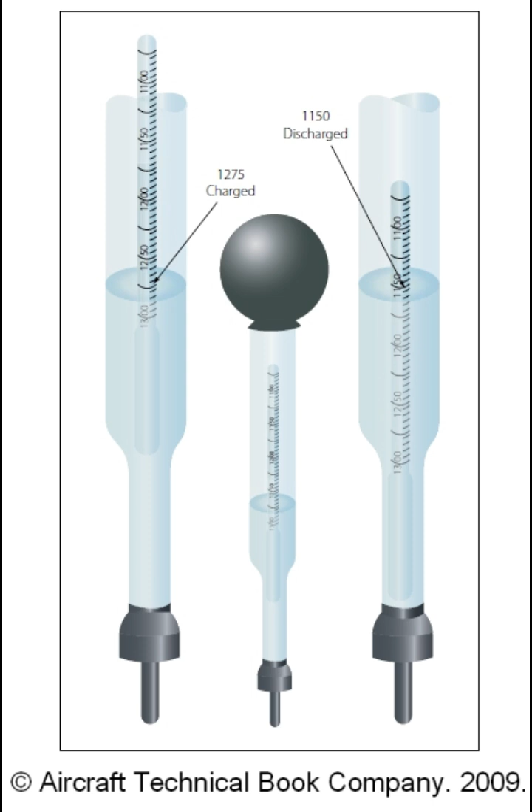This leads us to a unit called the slug, a unit of mass in the English system. An object weighing 32.2 pounds on Earth has a mass of exactly one slug. And conversely, if you know the mass, you find the weight by multiplying mass times the acceleration due to gravity, so weight equals mass times gravity. So that same one-slug object would exert less downward force on the moon because the moon's gravity is weaker.

This mass versus weight distinction also helps us understand why astronauts seem weightless up in the space station. They're just floating around, but it's not because gravity is zero up there. It's actually because the station and everything in it is constantly falling freely around the Earth, like a perpetual state of falling. Relative to their immediate surroundings inside the station, they experience that weightlessness. That's a really important distinction.

Now, another characteristic is attraction. This isn't like magnets. In physics, attraction refers to the fundamental force that exists between all particles of matter, a force that tends to pull them towards each other. Sir Isaac Newton's law of universal gravitation describes this force perfectly. It's the same force keeping us on the ground right now, and the same force that dictates how planets orbit the sun. Every single bit of matter pulls on every other bit of matter. That's pretty profound when you think about it.

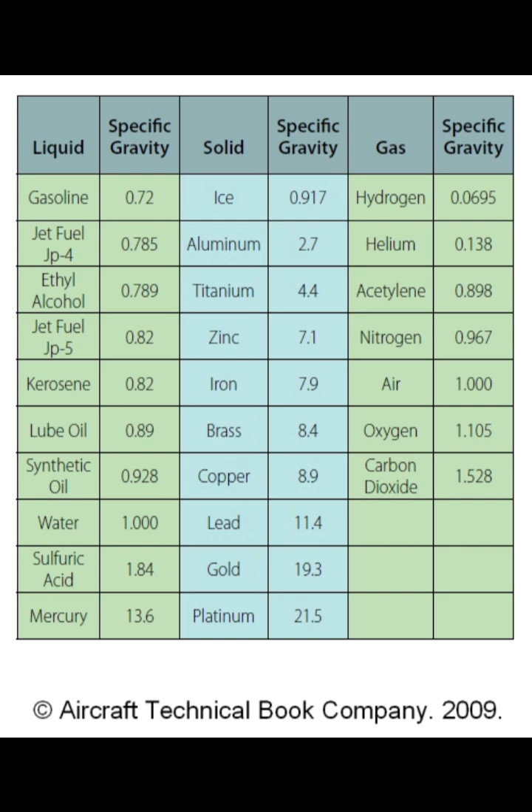And that number sounds familiar—isn't that water? It is. That's the density of pure water at 4 degrees Celsius, and it's often used as a reference point, a standard for comparing the densities of other liquids and solids. So water is the benchmark for liquids and solids.

Generally, yes. But when dealing with gases, you have to be more careful because pressure plays a big role. Ah right, gases can be squeezed. Exactly—the density of a gas is directly affected by the pressure on it, so standard conditions have been set up for reporting gas densities. Standard conditions, like what? Usually a temperature of 0 degrees Celsius and a pressure equal to 76 centimeters of mercury, the average atmospheric pressure at sea level. Got it—so density depends on weight and volume, and for gases, pressure is key.

Now, what about specific gravity? That sounds related to density. It is very related. In physics, the word specific often signals a ratio, and that's what specific gravity is—a way to compare the density of some substance to the density of a standard reference substance. Okay, a comparison—what's the standard? Well, for liquids and solids, the standard is usually water, like we just discussed. For gases, it's typically air, although sometimes hydrogen is used instead.

So it's like a relative density score. How do you calculate it? There are a couple of ways. For liquids and solids, you can take the weight of a certain volume of the substance and divide it by the weight of the exact same volume of water. Or you can just divide the density of the substance by the density of water. Same idea for gases, just using air or hydrogen as the denominator.

And what units does specific gravity have? Ah, that's a key point—specific gravity is actually a dimensionless ratio. It has no units. It's just a number.

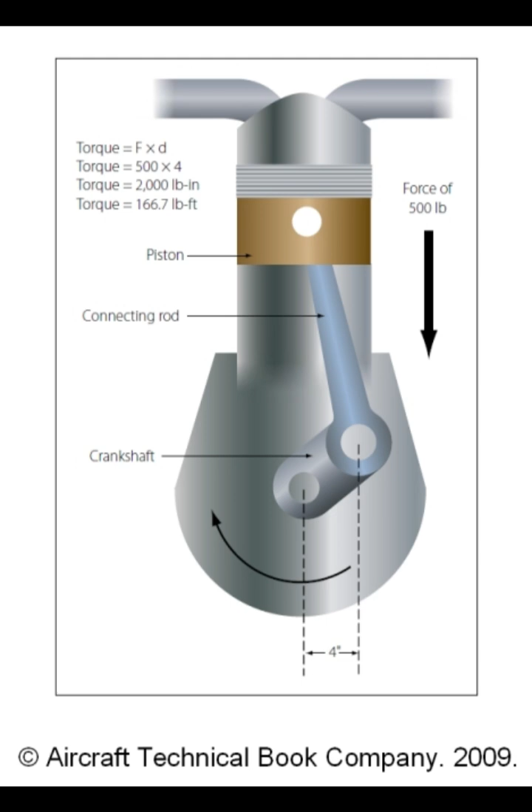And units - pounds? Yep, the standard unit in the English system is the pound. In metric, it's the Newton, N. 1 pound is about 4.448 newtons. And when we talk about engine thrust, we're talking about force. We use that famous formula, force equals mass times acceleration, F equals ma. The result is expressed in pounds of thrust, like for a big jet engine. Exactly, that huge GE 90-115B turbofan can produce something like 115,000 pounds of thrust. That's pure force pushing the plane forward - an incredible amount of push.

So how does force relate to the idea of work? Well, in physics, work is done specifically when a force acts on an object and makes it move some distance. So you need both force and movement - yes, absolutely, both are required. And the movement has to be in the direction of the force. The formula is simple: work equals force times distance. W equals FD. And the units are foot-pounds.

So if I push as hard as I can against a parked 747 and it doesn't move an inch - you might feel tired, but technically in physics terms, you haven't done any work. No displacement, no work. But if a jack lifts, say, an Airbus A320 that weighs 150,000 pounds, and lifts it 4 feet, now you've done work. The work done is 150,000 pounds times 4 feet, which equals 600,000 foot-pounds.

Or another example - a tow tractor pulling a Boeing 737-800, maybe 130,000 pounds, into a hangar. If the tractor exerts a steady force of 5,000 pounds over a distance of 80 feet, the work done is 5,000 pounds times 80 feet, or 400,000 foot-pounds. Notice something interesting there - the force is much less than the plane's weight. Exactly, because the movement is horizontal, the tractor isn't lifting the plane's full weight.

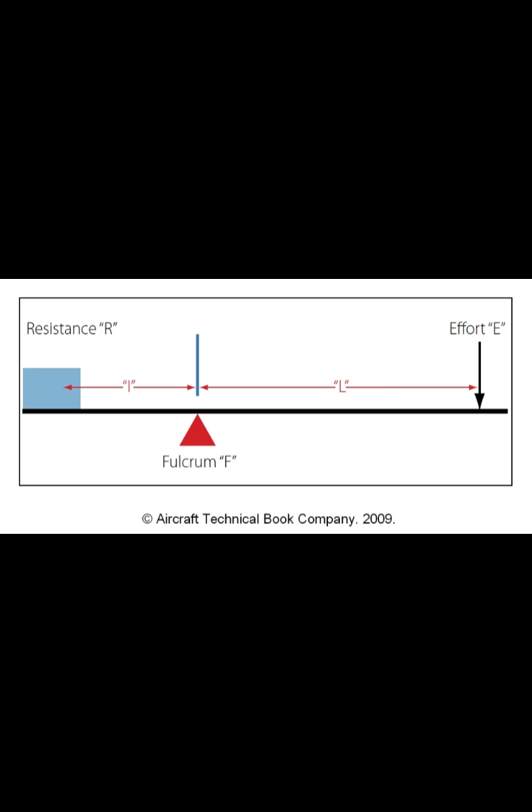Okay, let's use an example. That GE90 engine we mentioned weighs about 19,000 pounds. If we lift it 4 feet, maybe it takes 2 minutes. How much power is that? All right, first, the work done: 19,000 pounds times 4 feet is 76,000 foot-pounds.

Now, power is work over time. The time is 2 minutes, so power is 76,000 foot-pounds divided by 2 minutes, just 38,000 foot-pounds per minute. Exactly. Now, to convert that to horsepower, we divide by the conversion factor, 33,000 foot-pounds per minute per horsepower. So 38,000 divided by 33,000 comes out to about 1.15 horsepower. So even lifting that heavy engine fairly slowly takes over 1 horsepower. Yep, shows you why we use machinery for things like that.

Definitely. Okay, last one in this group: torque.

It sounds like work you mentioned, but it's different. That's right, they can seem similar but they're conceptually different. Work is force acting through a distance, causing linear displacement. Torque is a force acting at a distance from a pivot or axis, creating a rotational or twisting effect.

Twisting force, like using a wrench. Perfect example. You apply force to the wrench handle, which is some distance from the bolt. That force at that distance creates torque, which turns the bolt.

And the units look similar, inch-pounds or foot-pounds. Yeah, they often look the same, pound-feet or foot-pounds, pound-inches or inch-pounds. But the meaning is different. Work is force times linear distance. Torque is force times lever arm distance.

Okay, and this is critical for engines. Absolutely essential for understanding how both piston engines and turbine engines create rotation. How does it work in each type?

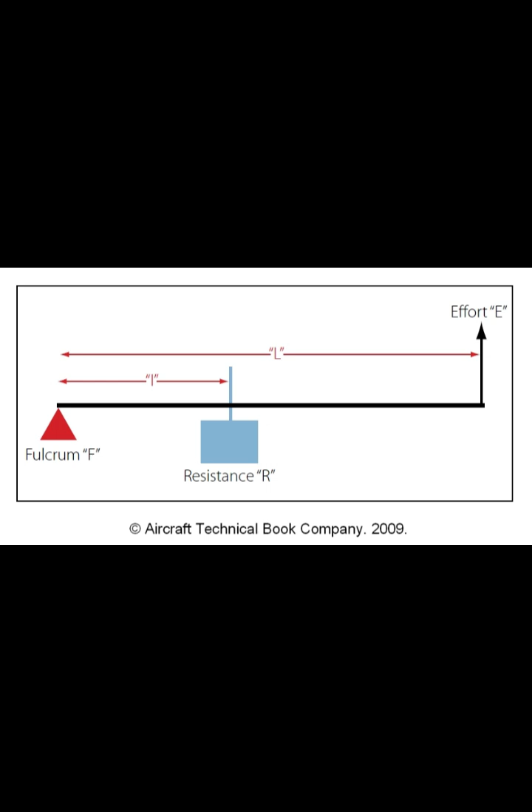How do they do that? Generally, simple machines work in one of three ways. They can multiply the force you put in, they can increase the speed or distance that the force acts over, or they can simply change the direction of the force you apply.

Okay, and we talk about mechanical advantage. Right, mechanical advantage tells you how much the machine multiplies your input force or distance. It's the ratio of the output force to the input force, or alternatively, the ratio of the output distance moved to the input distance moved. But here's a key thing: machines can't create energy. They can't give you more work output than the work you put in. There's always a trade-off, no free lunch basically.

Okay, let's start with levers. I remember there are different classes of levers based on the pivot point. Exactly, there are three classes, and it all depends on where the fulcrum, that's the pivot point, the effort, where you apply force, and the resistance, the load you're moving, are relative to each other. Okay, let's break them down.

Class 1, first class lever. The fulcrum is between the effort and the resistance. Think of a seesaw or maybe using a crowbar. Right, fulcrum in the middle. And depending on where that fulcrum is placed, a first-class lever can give you either a force advantage, less effort to move the load, or a distance-speed advantage. The load moves further faster than the effort point, or it might just change the direction of the force.

Okay, second class lever. The fulcrum is at one end, the effort is applied at the other end, and the resistance is somewhere in between. Fulcrum at one end, effort at the other, load in the middle. Like a wheelbarrow. Perfect example, a wheelbarrow is a classic second class lever. And this type always gives you a force advantage, always multiplies your force.

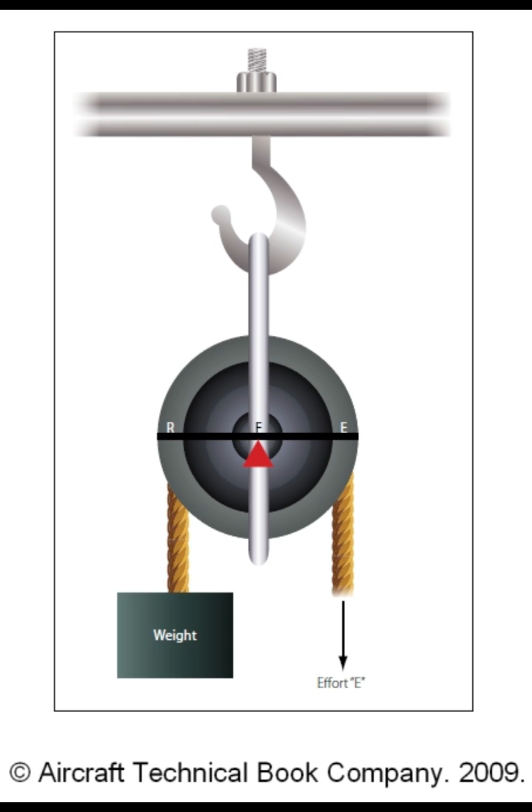Okay, moving from levers to pulleys. A pulley is basically a wheel on an axle designed to support movement of a rope or cable along its circumference. It usually has a groove. The pulley itself is often held in a frame called a block. When you have a system with multiple pulleys and ropes, that's called a block and tackle. What about just a single pulley?

Well, a single fixed pulley, one that's attached to a support and doesn't move up or down, acts just like a first-class lever with equal arms. So mechanical advantage of one. Exactly, it doesn't multiply your force. It just changes the direction you pull in, which can be really convenient.

Makes sense. What if the pulley itself moves with the load? Ah, that's a single movable pulley. That one acts like a second-class lever. It gives you a mechanical advantage of 2, so it halves the effort needed. Yes, but there's a trade-off: you have to pull twice the length of rope for the load to move up a certain distance. Force is halved, distance pulled is doubled. Okay, fixed pulley changes direction, movable pulley multiplies force.

Now, gears. Gears are essentially toothed wheels that mesh together to transmit motion and force, usually changing speed or torque, or sometimes direction. Different types of gears: spur gears have straight teeth parallel to the axis and connect parallel shafts. Bevel gears have angled teeth and connect shafts that are at an angle, allowing you to change the plane of rotation, like from horizontal to vertical.

Worm gears involve a screw-like worm meshing with a worm wheel and give you very large gear reductions. Large reduction, meaning speed decreases a lot. Yes, speed decreases significantly, but torque increases proportionally.

Then there are planetary gears. Planetary, like planets orbiting a sun? Sort of—you have a central sun gear, several planet gears orbiting it, and an outer ring gear. They're compact and offer specific, often quite large, gear reduction ratios based on the number of teeth on each gear. And the gear ratio always affects speed and torque. Always—if you gear it to increase speed, torque goes down. If you gear it to increase torque, speed goes down. That's the trade-off, assuming no energy loss to friction.

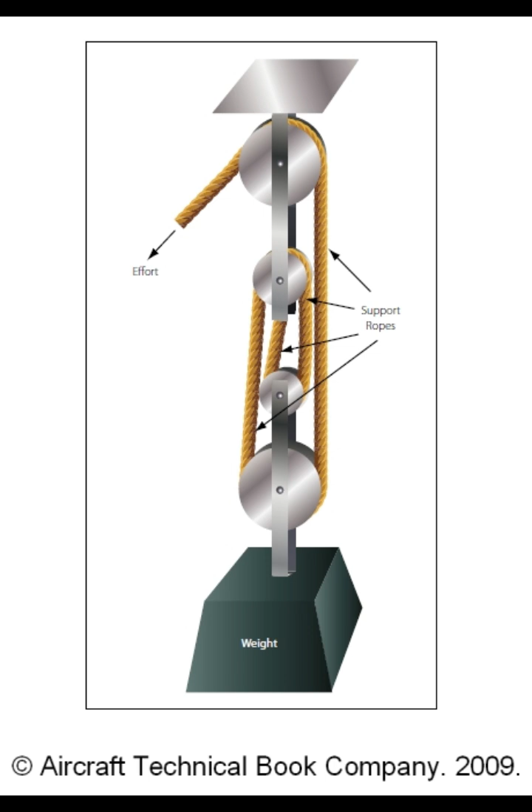The same basic lever equation can actually be applied: effort times the length of the ramp, the effort arm, equals the resistance, the object's weight, times the vertical height of the ramp, the resistance arm. So if you push a 1,600-pound airplane up a ramp that's 24 feet long and rises 6 feet vertically.

The effort needed, ignoring friction, would be 1,600 pounds times 6 feet divided by 24 feet, which is 400 pounds—much less than lifting 1,600 pounds straight up. Right, and things like screws, bolts, and wedges are all applications of the inclined plane principle too. A small rotational force over many turns becomes a large linear force. Clever. Okay, that covers simple machines.

Now let's think about what happens inside materials when forces are applied: stress and strain. Stress is the internal resistance within a material to an external force that's trying to deform it. It's like the internal forces the molecules exert on each other. Internal resistance, and it comes in different forms.

There are 5 main forms, generally. Tension is a pulling force, trying to stretch something apart, like ropes in a block and tackle. Compression is a pushing or crushing force, like the force on landing gear when the plane touches down. Torsion is stress from twisting, like the torque on an engine drive shaft. Bending is actually a combination—one side of the object is in tension, the other side is in compression. Like an airplane wing bending upwards in flight: the top surface is stretched, tension, the bottom is squeezed, compression. Tension and compression together.

And the last one, shear. That's a force trying to make layers of the material slide past each other, like scissors cutting paper, or the force on a bolt connecting two overlapping plates. Okay, tension, compression, torsion, bending, shear—those are the types of stress.

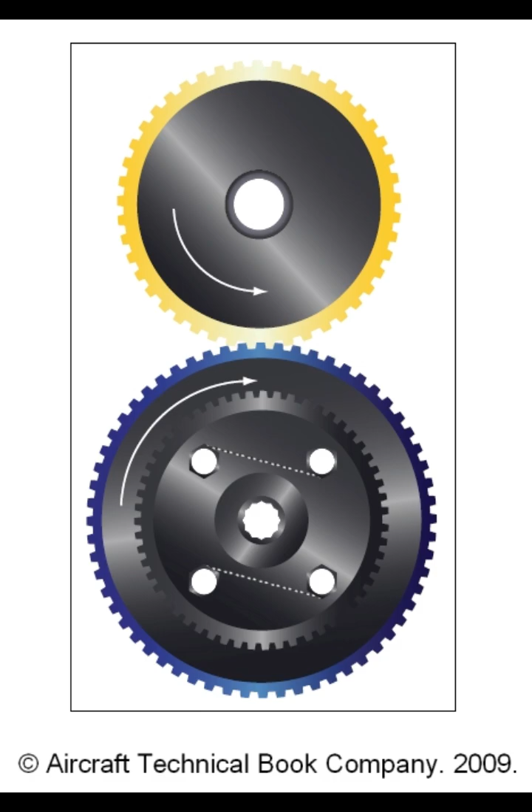So if velocity is changing, that leads to acceleration. Acceleration is the rate of change of velocity, not just speed, but velocity—so speeding up, slowing down, or changing direction all count as acceleration. The formula for average acceleration is the change in velocity, final velocity minus initial velocity, divided by the time it took for that change.

Example: say an F-15 fighter jet goes from 400 miles per hour to 1,200 miles per hour in 20 seconds. The change in velocity is 1,200 minus 400, equals 800 miles per hour. The time is 20 seconds, so the acceleration is 800 miles per hour divided by 20 seconds, which is 40 miles per hour per second—40 miles per hour faster every second. And we can convert that to feet per second squared, which is a more standard unit. It works out to about 58.7 feet per second squared.

And we can relate that to g-force. 1g is the acceleration due to gravity, about 32.2 feet per second squared. So 58.7 divided by 32.2 is roughly 1.82 Gs—that's the force the pilot feels pushing them back in their seat. Feeling heavier during acceleration.

These ideas—force, mass, acceleration—bring us straight to Newton's laws of motion. Absolutely fundamental for aviation, right? Couldn't fly without them; they are the bedrock of classical mechanics. Let's start with Newton's first law.

The law of inertia. It basically says an object at rest stays at rest, and an object in motion stays in motion with constant velocity, same speed, same direction, unless acted upon by an external force. Things keep doing what they're doing unless something interferes. Exactly, that's inertia, the resistance to change in motion.

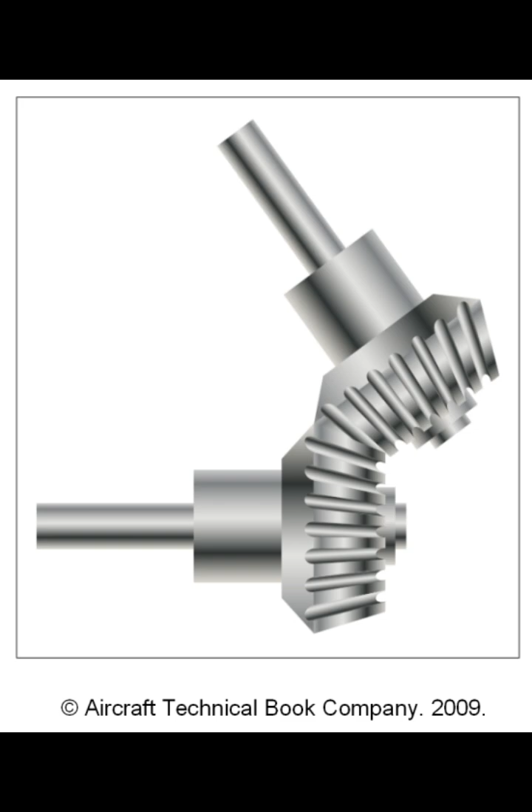And the third law, the famous one: action-reaction. For every action, there's an equal and opposite reaction. Forces always come in pairs. When you push on a wall, that's the action; the wall pushes back on you with the same force, that's the reaction.

In aviation, when a propeller pushes air backward, that's the action, and the air pushes the propeller and thus the plane forward, that's the reaction. That's thrust. Same for a jet engine: the engine throws hot gas backward at high speed, action, and the reaction force pushes the engine and the plane forward. Lift is also related.

The wing pushes air down, action. The air pushes the wing up, reaction. Action-reaction pairs everywhere. Okay, Newton's laws are key.

Now, what about motion that isn't in a straight line? Like turning, circular motion. Circular motion is motion along a curved path with a constant radius. Think of swinging a weight on a string around your head.

Even if the speed is constant, the velocity is always changing because the direction is always changing. Right, velocity includes direction. And since velocity is changing, there must be acceleration. And if there's acceleration, Newton's second law, F=MA, tells us there must be a force causing it.

A force required just to keep it moving in a circle. Yes, this force is always directed towards the center of the circle. It's called centripetal force, center-seeking force. Without it, the object would just fly off in a straight line, tangent to the circle. Centripetal force pulls it inward, keeping it on the curved path.

Is there a formula? Yep, centripetal force, Fc, equals mass times velocity squared divided by the radius of the circle, Fc = mv squared over r. Again, mass, not weight. Use mass, weight divided by 32.2. Velocity should be in feet per second and radius in feet.

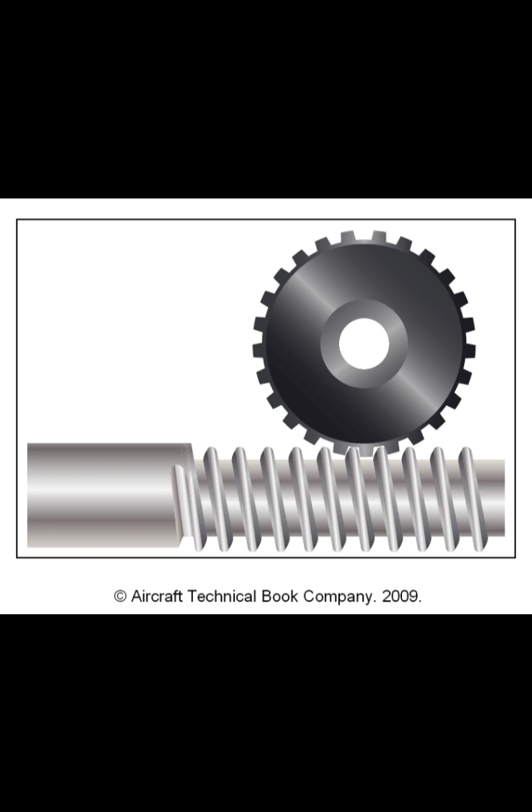Wow, that really highlights the forces on rotating parts in engines, like turbine blades spinning super fast. Exactly, the stresses involved are immense.

Incredible. Okay, let's switch gears again, moving from motion to another fundamental form of energy: heat. Heat is a form of energy, often defined as energy transferred between systems because of a temperature difference. It's also closely related to the internal energy of a system, specifically the kinetic energy of all the randomly moving molecules within it. More heat generally means more molecular motion.

So higher temperature means molecules are bouncing around faster. That's the basic idea, yes.

And heat can be generated by converting other forms of energy. Mechanical energy from friction becomes heat. Electrical energy in a heating element. Chemical energy in burning fuel. Radiant energy from the sun. Nuclear energy. They can all be converted to heat.

So compressing a gas makes it hotter. Yes, because the mechanical work done to compress it increases the kinetic energy of the gas molecules. Conversely, letting a gas expand rapidly makes it cool down.

And friction definitely generates heat. Absolutely, rub your hands together. That's mechanical energy turning into heat via friction. The core theory views heat as the total kinetic energy of those moving particles.

Okay, how do we measure heat energy? What are the units? Two common units are the calorie, with a small c, and the British thermal unit, or BTU. 1 calorie is the heat needed to raise the temperature of 1 gram of water by 1 degree Celsius. 1 BTU is the heat needed to raise 1 pound of water by 1 degree Fahrenheit. Grams in Celsius for calorie, pounds in Fahrenheit for BTU.

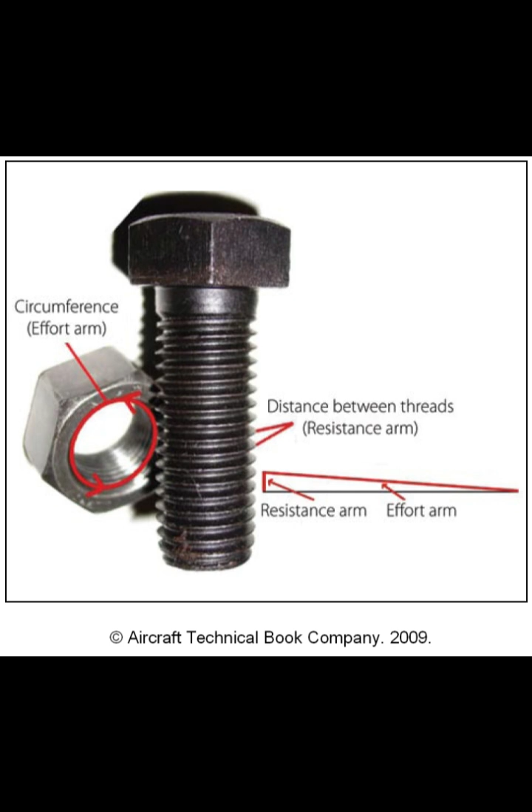Wow. Yeah. So think about aviation gasoline. 1 pound of it has about 18,900 BTUs of chemical energy locked inside. If you could convert all that energy perfectly into work, it would be 18,900 BTU times 778 foot-pounds per BTU, which is over 14.7 million foot-pounds of potential work per pound of fuel.

Incredible potential. But engines aren't perfect, right? Thermal efficiency. Exactly. Real engines lose a lot of that potential energy as waste heat through the exhaust, the cooling system, and friction. Thermal efficiency is the ratio of the useful work or power the engine actually produces compared to the potential power available in the fuel it consumes.

How efficient are typical aircraft engines? Well, a typical aircraft piston engine might only have a thermal efficiency of around 25% to 30%. So 75% of the fuel's energy is just lost. Mostly lost as heat, yes. Improving thermal efficiency is a huge goal in engine design.

I can see why. Okay, so a lot of energy is wasted as heat. How does heat actually get from one place to another? What are the transfer mechanisms? There are 3 main ways heat moves: conduction, convection, and radiation. Okay, conduction first.

Conduction is heat transfer through direct physical contact. Hotter, faster-moving molecules bump into slower, cooler ones and transfer kinetic energy. Like heat traveling up a metal spoon left in hot soup. Perfect example. Metals are generally very good conductors of heat. Materials like wood, plastic, or air are poor conductors. We call them insulators. Okay, direct contact transfer, what's convection?

Convection is heat transfer by the movement of fluids. That means liquids or gases. Movement of the fluid itself. Yes. When you heat a fluid, it usually becomes less dense and rises. That rising fluid carries thermal energy with it. Think of hot air rising from a radiator, or water boiling in a pot. The hot water rises, cooler water sinks, creating a convection current.

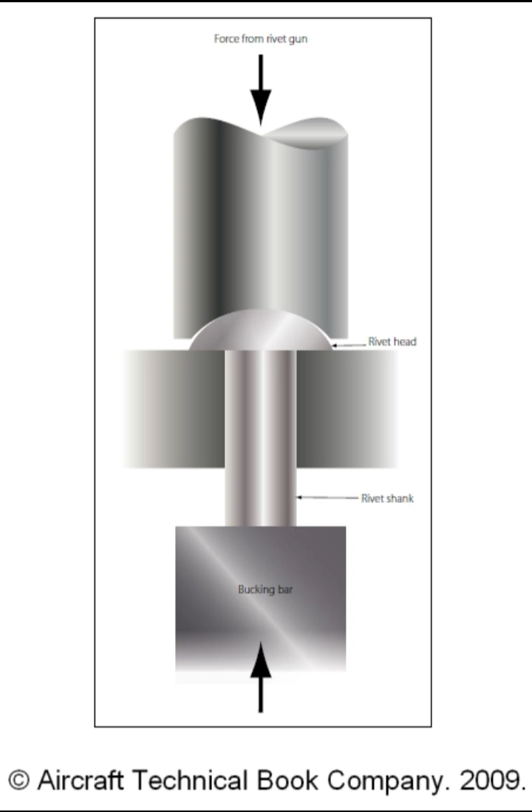Now, specific heat, what does that term mean? Specific heat capacity, or just specific heat, tells you how much heat energy is needed to raise the temperature of a certain amount of a substance by 1 degree. How much heat for a 1 degree change? Right, usually per unit mass, like per gram or per pound. It's an intrinsic property of the material itself. Some materials heat up easily with little energy, others require a lot more heat for the same temperature change.

And water is special here. Water has a remarkably high specific heat capacity compared to most common substances, meaning it takes a lot of energy to heat water up. Yes, and it also means it releases a lot of heat when it cools down. This is why large bodies of water, like oceans, have such a moderating effect on the climate of nearby land areas. They resist large temperature swings, acting like a big thermal buffer.

Okay, let's talk about temperature itself. We measure how hot or cold something is, but there are different scales. The three main scales you'll encounter are Celsius (degrees C), Fahrenheit (degrees F), and Kelvin (K). Celsius is based on water freezing at 0 degrees C and boiling at 100 degrees C at standard pressure. Fahrenheit sets those points at 32 degrees F and 212 degrees F.

Okay, different reference points. What about Kelvin? Kelvin is an absolute temperature scale. 0.0 K is absolute zero, the theoretical point where all molecular motion stops. It's impossible to actually reach, but it's the fundamental zero for thermodynamics. Water freezes at about 273.15 K and boils at 373.15 K.

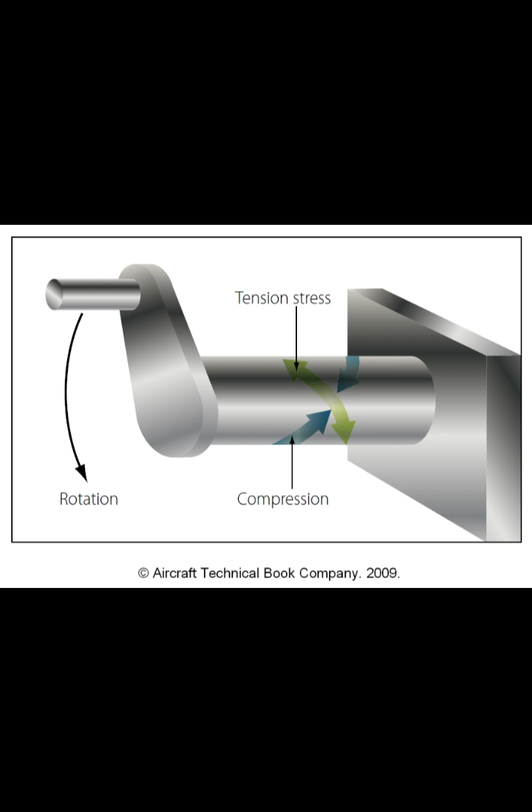Okay, focusing on solids, like in aircraft structures, how do we quantify that expansion? We use something called the coefficient of linear expansion. It's the property of the material that tells you how much its length changes for every degree change in temperature, per unit of its original length - a coefficient for each material. The formula for the change in length involves alpha, the coefficient, L, the original length, and the change in temperature.

So length times coefficient times temperature change. Exactly. For example, a steel rod might expand a tiny fraction of an inch for every foot of its length for each degree Fahrenheit rise. Doesn't sound like much. It doesn't, but if you have a long structure, like an aircraft wing, spanning many feet, and it experiences a large temperature swing from ground to high altitude, that total expansion can be significant. And if that expansion is blocked or constrained, it can generate enormous internal forces and stresses. Aircraft design has to account for this thermal expansion and contraction very carefully, using expansion joints or materials with compatible expansion rates to avoid damage.

Critical design consideration, then. Okay, let's move on to pressure. Pressure is defined as force acting perpendicularly on a surface, divided by the area over which that force is distributed.

Pressure is force per unit area, force divided by area. Common units include pounds per square inch, PSI. In meteorology and sometimes aviation, you also see inches of mercury (Hg), millimeters of mercury, or millibars.

Inches of mercury? How does that measure pressure? That comes from the mercury barometer, an inverted tube of mercury sitting in a dish of mercury. The atmosphere pushes down on the mercury in the dish, and that pressure supports a column of mercury inside the tube. The height of that column, measured in inches or millimeters, indicates atmospheric pressure. Ah, so the weight of the air balances the weight of the mercury column. Precisely. Standard atmospheric pressure at sea level is defined as 14.7 psi, equivalent to supporting a column 29.92 inches high. So 14.7 psi equals 29.92 inches Hg.

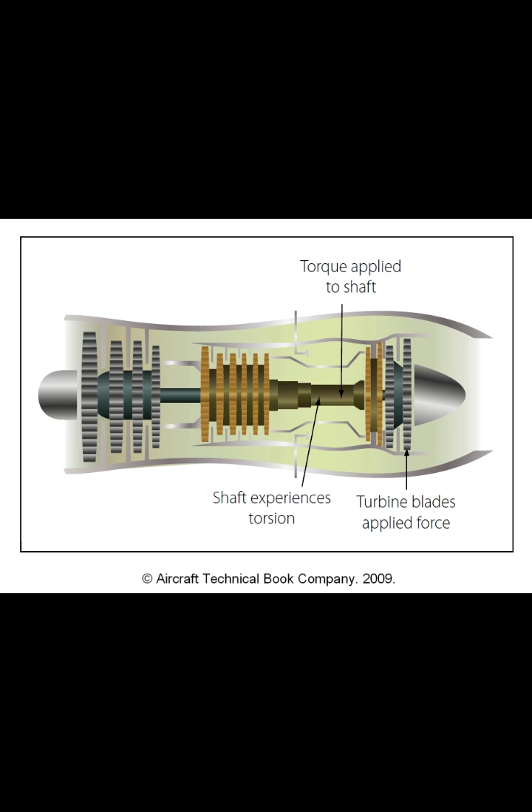That's why tire pressure increases on a hot day, the air molecules inside speed up.

Makes sense. And Dalton's law? Something about mixtures. Dalton's law of partial pressures says that if you have a mixture of gases that don't chemically react with each other, the total pressure of the mixture is simply the sum of the pressures that each gas would exert if it were alone in the same container. So each gas contributes its own partial pressure to the total. Exactly. It's related to the proportion of each gas in the mixture, important for understanding air, which is a mixture.

Okay, pressure is force over area, caused by molecular collisions in gases. Now let's get into fluid mechanics, crucial for aviation. Absolutely. Fluid mechanics studies how fluids, which includes both liquids and gases, anything that can flow, behave, both when they're still, fluid statics, and when they're moving, fluid dynamics.

Liquids and gases, what's the key difference? A major difference, especially in aviation contexts, is compressibility. Liquids are generally considered incompressible, their volume doesn't change much with pressure. Gases, however, are highly compressible.

And fluid mechanics explains things like lift. Lift, hydraulics, airflow through engines, many core aviation principles rely heavily on fluid mechanics.

Let's start with buoyancy, that upward push fluids give. Right, buoyancy is the upward force exerted by a fluid on any object immersed in it. It opposes the object's weight, making it seem lighter. And if the buoyant force is big enough, the object floats. Exactly, an object floats if the buoyant force equals or exceeds its weight. Archimedes' principle is the key here.

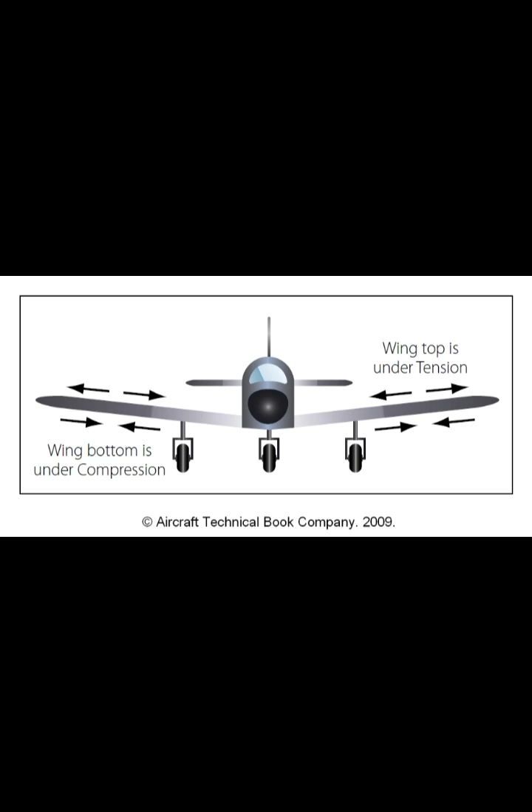Yes. And interestingly, the pressure at the bottom of a container just depends on the height of the liquid column and its density, not the shape of the container itself. Shape doesn't matter, only height. For static pressure at the bottom, yes.

We also distinguish between static pressure, due to height or depth, and dynamic or ram pressure, which is pressure associated with the fluid's motion, its kinetic energy. Static versus dynamic pressure, okay. The total pressure in a moving fluid is the sum of the static and dynamic pressures. We measure this total pressure in places like jet engine inlets.

Got it. Now, Pascal's law. Something about pressure acting equally in hydraulics. Exactly. Pascal's law has two key parts. First, pressure at any point in a confined static fluid acts equally in all directions. Second, if you apply an additional pressure to a confined, incompressible fluid, that pressure increase is transmitted undiminished throughout the entire fluid. Transmitted everywhere equally.

How does that help with hydraulics? It's the foundation. Because pressure equals force over area, if you apply a small force to a small piston, small area, you create a certain pressure in the hydraulic fluid. That pressure is transmitted everywhere. If that same pressure then acts on a much larger piston, large area elsewhere in the system, the output force on that large piston will be much larger than the input force.

Ah, you multiply the force. Yes. Apply 5 pounds to a 0.5 square inch piston, you get 10 psi pressure. If that 10 psi acts on a 5 square inch piston, the output force is 10 psi times 5 square inches, equals 50 pounds. You turn 5 pounds into 50 pounds. That's the magic of hydraulics.

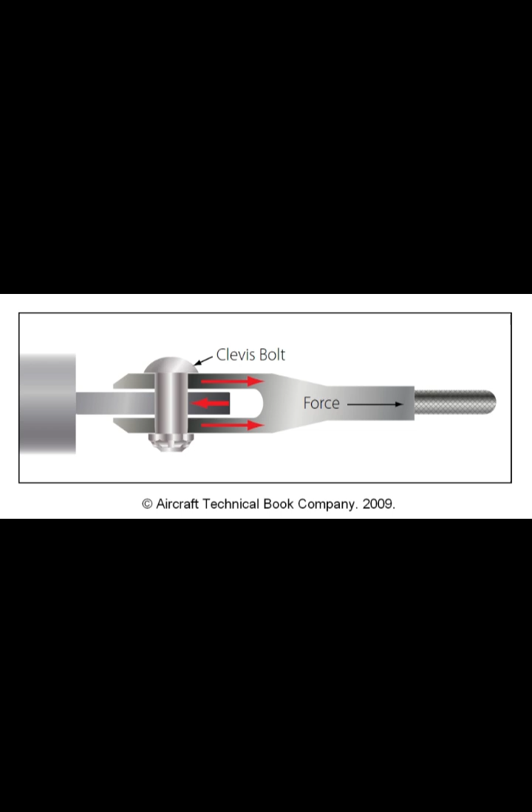How does this create lift on a wing? An airplane wing's airfoil shape is designed, crucially, so that the air flowing over the curved top surface travels a longer distance than the air flowing under the relatively flatter bottom surface in the same amount of time. So the air on top has to go faster.

Exactly. And according to Bernoulli, that faster-moving air on top exerts lower static pressure than the slower-moving air underneath the wing. Lower pressure on top, higher pressure on the bottom. Creates a net upward force. That pressure difference, acting over the whole area of the wing, is lift. Amazing. Just the shape of the wing makes the air speed up on top, pressure drops, and it gets sucked upwards. That's a good way to visualize it.

It's also used in carburetors. The Venturi effect creates low pressure to suck fuel into the airflow. It's fundamental to subsonic flight. Bernoulli: faster flow, lower pressure.

Got it. Okay, let's switch to sound now. What is sound physically? Sound is basically a disturbance, a vibration, that travels through matter, a medium, like air, water, or solids, as a wave. A wave traveling through a medium.

What's needed for sound? Usually 3 things: a source to create the vibration, like vocal cords or a tuning fork, a medium for the wave to travel through, and a detector to sense it, like our ears. Source, medium, detector. How does the wave work, like a water wave? Water waves are a good visual, but they're typically transverse waves. The water molecules move up and down perpendicular to the direction the wave travels. Okay, sound waves are different.

Yes, sound waves in air are longitudinal waves. The air molecules vibrate back and forth parallel to the direction the sound wave is moving. Imagine hitting a tuning fork: as the prongs vibrate outward, they compress the air molecules nearby, creating a high pressure region, a compression. As they move inward, they leave a region of lower pressure, a rarefaction. These compressions and rarefactions travel outward from the source as the sound wave, even though the individual air molecules just oscillate back and forth around their starting positions. The wave moves forward, but the air molecules just wiggle.

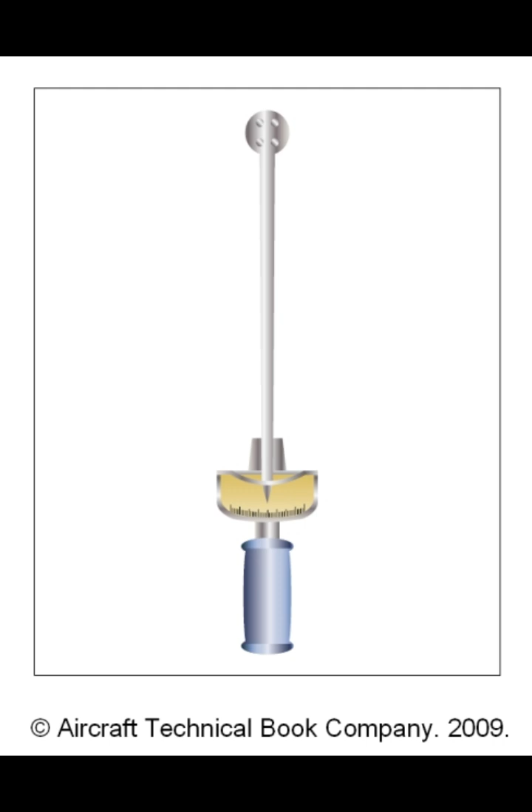What's resonance? Resonance happens when an object has a natural frequency it likes to vibrate at. If a sound wave hits it at that exact frequency, the object can absorb energy very efficiently and start vibrating with a really large amplitude, like a singer shattering a glass. That's a classic example. It's also why pilots might avoid certain engine speeds, RPMs, if they cause resonant vibrations in the propeller or airframe. Dangerous vibrations.

And sound intensity uses that decibel, dB, scale. Because the range of sound intensities our ears can handle is absolutely enormous, from incredibly faint to painfully loud, a linear scale wouldn't be practical. The decibel scale is logarithmic, so a small change in dB means a big change in actual intensity. Every 10 dB increase represents a 10-fold increase in sound intensity. It compresses that huge range into manageable numbers.

Now let's talk about the air itself, the atmosphere aircraft fly through. What's it made of? The atmosphere is a mixture, mostly nitrogen gas, about 78%, and oxygen gas, about 21%. There's about 1% argon, then tiny amounts of carbon dioxide, neon, helium, and other trace gases, plus always some water vapor and variable amounts of tiny particles like dust, pollen, and salt.

A complex mixture. Does the composition change with altitude? The proportions of the main gases stay pretty much the same up to quite high altitudes, maybe 50 miles or so, but the overall density drops off very rapidly as you go up. Much less air the higher you go, eventually so thin that you can't breathe, and engines can't run because there's not enough oxygen for combustion.

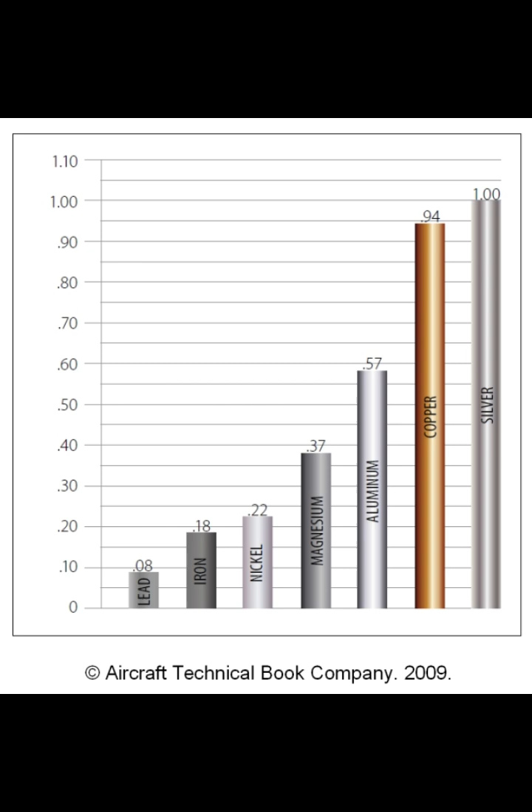Troposphere, stratosphere, mesosphere, thermosphere, exosphere. But for planes, the troposphere and lower stratosphere are most important. Absolutely, that's where almost all flying occurs. And this atmosphere exerts pressure.

Atmospheric pressure is simply the pressure caused by the weight of all the air sitting above any given point, the weight of the air column above you. At sea level it averages about 14.7 psi or 29.92 inches of mercury, then it decreases as you go up. Less air above you means less weight, so less pressure.

We measure it with barometers, either the mercury type or, more commonly now, aneroid barometers. Aneroid uses a small, sealed metal cell that expands or contracts as outside air pressure changes. This movement is linked mechanically to a needle or digital display. Aircraft altimeters are essentially sensitive aneroid barometers calibrated to show altitude instead of pressure. The altimeter measures pressure to figure out altitude.

What's the pressure at, say, 10,000 feet? Standard pressure at 10,000 feet is about 10.1 psi, or around 20.58 inches of mercury, significantly less than at sea level. And density also decreases with altitude.

Yes, and this is crucial for aviation. Density is affected by both pressure and temperature, according to the gas laws. As you go up, pressure drops faster than temperature in the troposphere, so density decreases significantly. Lower density means less air for the wings to push against, less air for the engines. Exactly, it impacts lift, drag, engine power, everything.

That's why we use the concept of density altitude, a way to express the effective altitude based on the actual air density at a given location and time. On a hot day, or at high elevation, the air is less dense than standard, so the density altitude might be much higher than the actual field elevation. So the plane performs as if it were at that higher density altitude. Precisely, it's a critical calculation for takeoff and climb performance, especially on hot, high, or humid days.

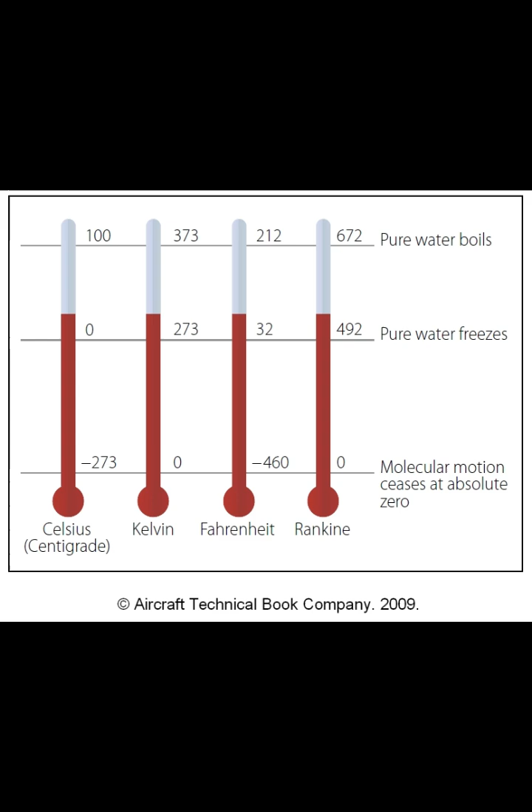Does humidity affect engines? It can. For piston engines, the less dense air means slightly less power for a given throttle setting. Also, the water vapor displaces some oxygen needed for combustion. Sometimes, though, in high-performance supercharged engines, the cooling effect of water vaporizing in the cylinder can slightly reduce the risk of detonation, which is interesting.

Complex effects. Yeah, and vapor pressure, that's just the portion of the total atmospheric pressure that is due to the water vapor present in the air. It's directly related to the dew point temperature.

Now to compare aircraft performance fairly, we need a baseline, the standard atmosphere. Exactly, the standard atmosphere provides a defined set of reference conditions for pressure, temperature, density, and gravity at various altitudes, starting from sea level. What are the standard sea level values? Standard sea level pressure, P zero, is 29.92 inches of mercury. Standard temperature, T, is 15 degrees Celsius or 59 degrees Fahrenheit. Standard gravity, G, is 32.174 feet per second squared.

Okay, 29.92 inches Hg, 15 degrees Celsius, 59 degrees Fahrenheit, that's the benchmark everyone uses. Yes, it allows for consistent comparison of performance data worldwide. The U.S. standard atmosphere aligns with the ICAO, International Civil Aviation Organization, standard.

All right, we've covered matter, energy, forces, fluids, sound, the atmosphere. Now let's finally put it all together and talk about the theory of flight for aircraft. Right, basic aerodynamics. Understanding this is obviously key to knowing how planes work. It starts with the 4 fundamental forces acting on an aircraft in flight. 4 forces, let's name them.

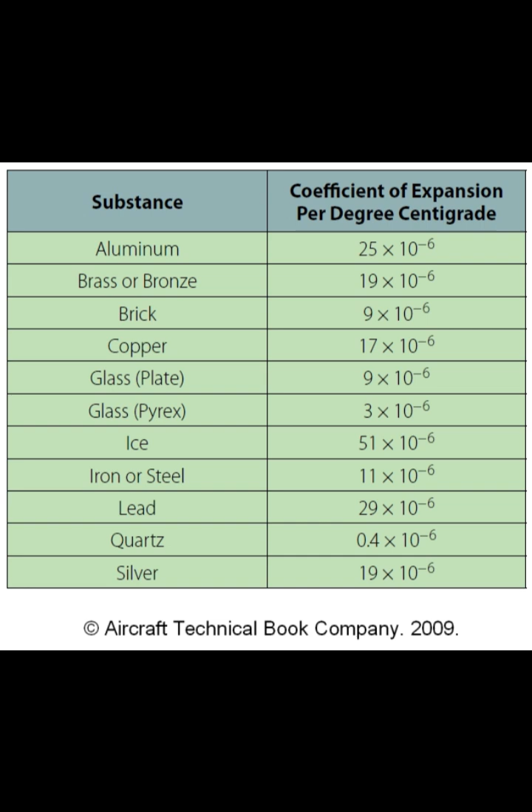Exactly. You can even use Newton's second law here. The lift force is related to the mass of air being deflected downwards per second and the acceleration, the change in downward velocity, given to that air. So Bernoulli's pressure difference and Newton's air deflection are just two ways of explaining the same thing. They really are. They describe different aspects of the same physical phenomenon that results in lift. Both are correct and useful perspectives.

Okay, good. Now let's talk more about that wing shape, the airfoil. An airfoil is just any surface designed to get a useful reaction from the air moving over it. Wings, propeller blades, helicopter rotor blades, even fan blades in a jet engine are all airfoils, designed to produce lift or thrust.

Key terms for describing an airfoil: we have camber, which is the curvature of the top and bottom surfaces. Usually the top surface has more camber, or curve on top. Then there's the chord line, a straight line from the very front edge, the leading edge, to the very back edge, the trailing edge. And crucially, the angle of attack - that's the angle between the chord line and the direction the air is coming from, the relative wind.

Relative wind is just the airflow direction as experienced by the wing, which is opposite to the aircraft's flight path. Increasing the angle of attack generally increases lift, up to a point - the stall point. We'll get to that. The camber, especially the upper camber, helps accelerate the flow over the top, creating that low pressure via Bernoulli.

Got it. What about the overall shape of the wing viewed from above, the planform? Wing planform matters too. Wings can be rectangular, elliptical, tapered, narrower at the tips, swept back like on jets, or delta-shaped. Each has different aerodynamic properties, different shapes for different speeds or roles.

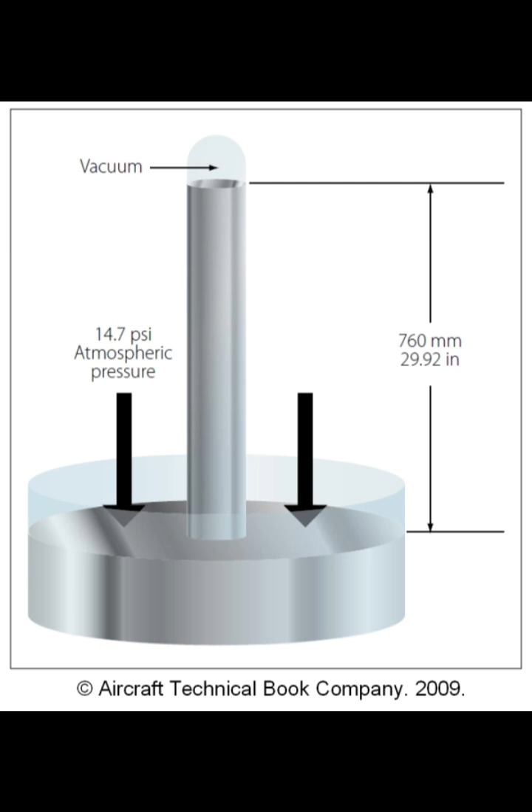But the bigger problem is flow separation. If the angle of attack gets too high, even the turbulent boundary layer can't stick to the sharply curving upper surface anymore. It separates, the flow breaks away from the wing. And when that happens, the low pressure region on top collapses, lift decreases dramatically, and drag increases sharply. That's an aerodynamic stall, a loss of lift.

Not good. Are there ways to control this boundary layer, delay the stall? Yes, several methods are used for boundary layer control. Wing leading edge slots are fixed openings that duct high-pressure air from underneath the wing to the top surface, just behind the leading edge. What does that do? That blast of high-energy air re-energizes the boundary layer on top, helping it stay attached at higher angles of attack.

Other methods: sometimes air suction is used, literally sucking the slow-moving boundary layer air away through tiny holes in the wing skin. Vortex generators are another common one, little fins on the wing. Those little vanes create tiny, energetic vortices that mix the faster air from outside the boundary layer with the slower air inside it, again helping to delay separation. Mixing the air to keep it attached.

Are there movable devices too? Slats? Yes, leading-edge slats are basically movable slots. They extend out from the leading edge at low speeds or high angles of attack to open up a gap, doing the same job as fixed slots, improving lift and delaying stall. Slots, suction, vortex generators, slats, lots of tricks to manage that boundary layer.

Okay, now let's talk flight controls. How does the pilot actually make the plane go where they want? Three axes: pitch, roll, yaw. Let's start with pitch, nose up, down. Pitch is rotation around the lateral axis, the one running wingtip to wingtip through the center of gravity.

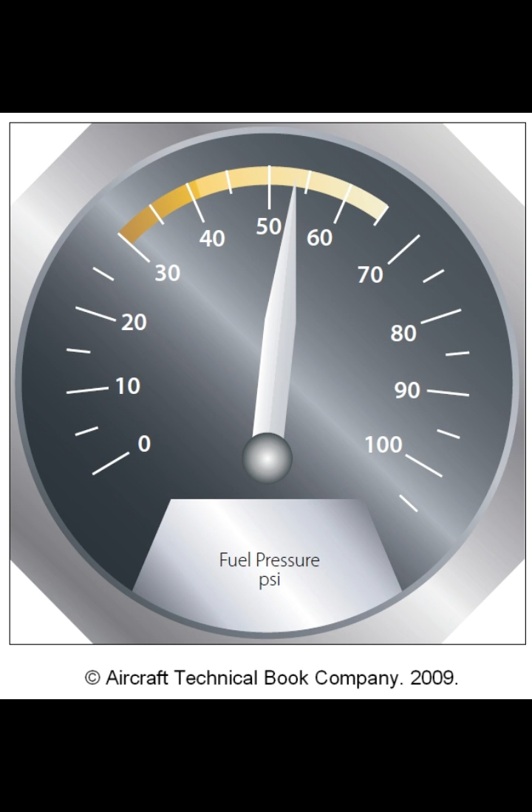Controlled primarily by the elevator, the movable surface on the trailing edge of the horizontal stabilizer, the small wing at the back. If the pilot pulls back on the control stick or yoke, the elevator deflects upwards, creating a downward aerodynamic force on the tail, which pivots the aircraft around the CG, making the nose pitch up. Pushing forward deflects the elevator down, pushes the tail up, and makes the nose pitch down. Simple hinge action changes the plane's angle.

What's a stabilator? Some planes, instead of a fixed stabilizer and a moving elevator, have the entire horizontal tail surface pivot as one piece. That's a stabilator, does the same job. And ruddervators on V-tails: on planes with a V-shaped tail, the two surfaces combine the function of both rudder for yaw and elevator for pitch. They move together for pitch and differentially for yaw. Clever combination. So pitch is controlled by elevator or stabilator via yoke or stick.

Now, roll is banking left-right. Roll is rotation around the longitudinal axis, running nose to tail through the CG, controlled by ailerons. These are movable surfaces on the trailing edges of the main wings, usually out near the tips. They work in opposition: if the pilot turns the yoke or moves the stick to the right, the right aileron goes up and the left aileron goes down. The upward aileron decreases lift on the right wing, the downward aileron increases lift on the left wing. This difference in lift creates a rolling moment.

So right yoke makes the right wing drop and the left wing rise, causing a roll to the right. Exactly, and turning the yoke left does the opposite: left aileron up, right aileron down, rolls the plane to the left. Differential lift on the wings causes the roll.

Okay, finally, yaw, nose moving left-right. Yaw is rotation around the vertical axis, straight up and down through the CG, controlled by the rudder, the movable surface on the trailing edge of the vertical stabilizer, the tail fin. Rudder controls yaw, how? With pedals. Yes, controlled by rudder pedals at the pilot's feet.

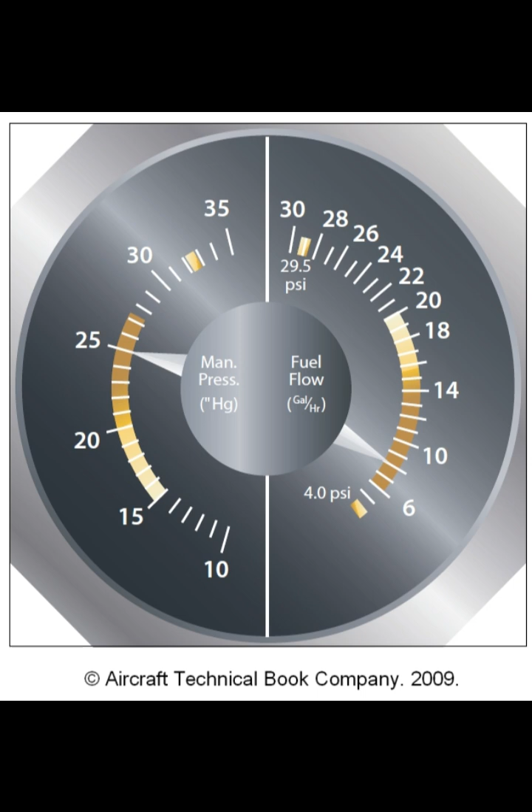When you use ailerons to bank, the wing that goes up actually creates a bit more drag temporarily, which can cause the nose to swing slightly opposite the direction of the turn. That's called adverse yaw, the nose lags behind. So the pilot uses rudder in the direction of the turn to counteract that adverse yaw and keep the nose smoothly following the turn arc. Ailerons initiate the bank, rudder keeps it coordinated. A coordinated dance between ailerons and rudder.

We also mentioned supplemental lift devices earlier. Flaps are probably the most common. They're usually on the trailing edge of the wings, inboard of the ailerons. When extended, they increase the wing's effective camber and often its area, which significantly increases lift, especially at lower speeds. They also increase drag.

More lift and more drag. Good for takeoff and landing. Exactly, it allows the plane to fly slower without stalling, making takeoff shorter and landing slower and steeper. There are different types: plain, split, slotted, Fowler, each work slightly differently.

And leading edge devices, slots and slats. Right, we mentioned them for boundary layer control, but they're also considered high lift devices because by delaying the stall, they allow the wing to operate effectively at higher angles of attack, which means more lift. So flaps, slots, slats all help generate more lift at low speeds.

Now, what happens when planes go really fast, approaching and exceeding the speed of sound? In high-speed aerodynamics, air becomes compressible. That's the key difference. Below about Mach 0.8, 80% the speed of sound, air mostly behaves as if it's incompressible. But as you get closer to Mach 1, the air starts to pile up in front of the plane, and its density changes significantly as it flows around the surfaces. It becomes compressible, and that changes the rules.

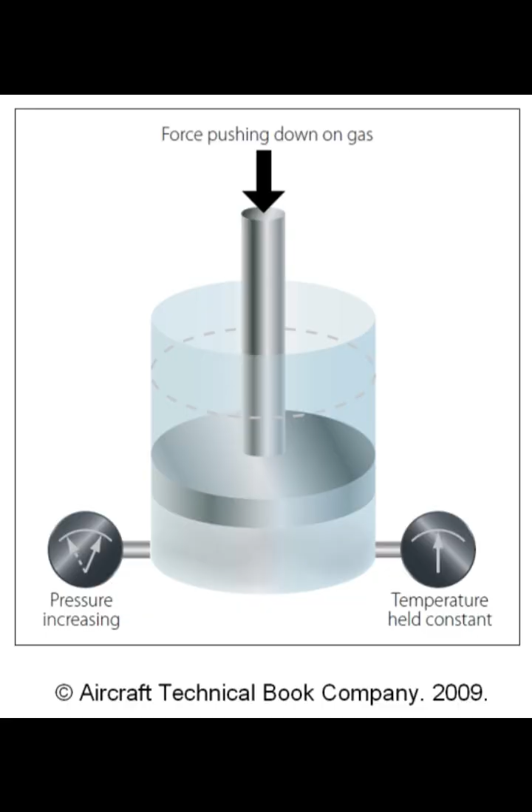What happens in transonic flight, around Mach 0.8 to 1.2? That's a tricky regime because parts of the airflow over the aircraft might be subsonic, while other parts, like over the top curve of the wing, become supersonic. Mixed flow speeds. Right, and where that supersonic flow has to slow back down to subsonic, a strong shock wave, called a normal shock wave, perpendicular to the flow, often forms.

And that's bad? It can be. Shock waves cause a sudden increase in pressure and temperature, a decrease in velocity, and often lead to airflow separation just behind the wave. This separation dramatically increases drag and can cause a loss of lift and stability problems. The center of lift can shift abruptly rearward, causing the nose to pitch down. Mach tuck. Sounds serious.

The speed where this starts is the critical Mach number. Yes, the critical Mach number is the speed at which the airflow somewhere on the aircraft first reaches Mach 1 and shock waves begin to form significantly.

And fully supersonic flight, above Mach 1.2? Then the entire airflow around the plane is supersonic. Shock waves are still present, but they are typically attached to the nose, leading edges, and trailing edges, and are often oblique, angled, rather than normal. Hypersonic flight is generally considered to be above Mach 5.

Shockwaves are key. Can you explain them a bit more? What are they physically? A shock wave is an extremely thin region where the properties of the air, pressure, temperature, density, change almost instantaneously.

It's formed by the constructive interference, the piling up, of all the pressure waves created by the object moving at or above sound speed. Piling up of sound energy. And if they reach the ground, we hear a sonic boom. Exactly, it's the abrupt pressure change hitting your ear.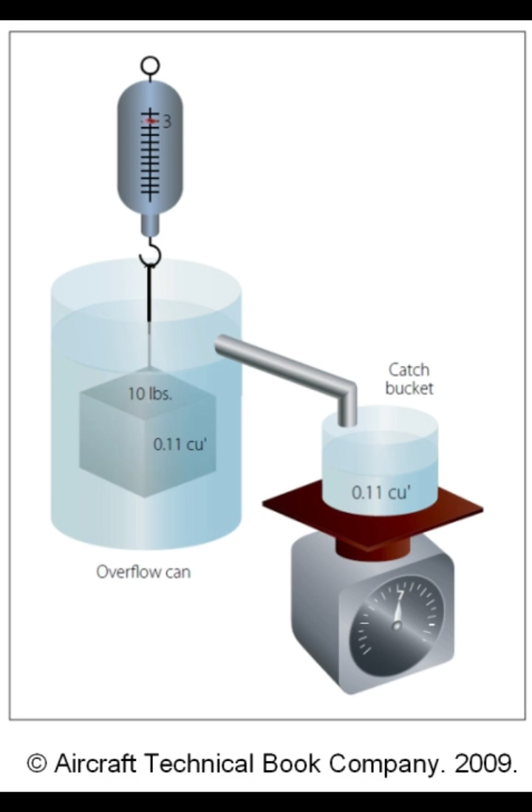Okay, and oblique shocks. Oblique shock waves are angled relative to the flow. They form on sharp leading edges and cones in supersonic flight. The flow behind an oblique shock can still be supersonic, though slower, and the pressure jump is less drastic than across a normal shock. Supersonic airfoils also generate expansion waves where the flow turns around a convex corner, causing pressure to drop. So the shape of the shockwaves changes as speed increases.

Definitely. As an aircraft accelerates through the transonic regime, shock waves first form on the upper wing surface, strengthen, move rearward, and eventually, in fully supersonic flight, you get attached oblique shocks at the leading and trailing edges, assuming the wing is designed for it. Managing these shock waves and the associated drag and stability changes is the main challenge of high-speed flight.

Fascinatingly complex. Okay, let's shift completely now to helicopters. Rotating wings, very different aerodynamics. Very different in many ways, yes. The main rotor blades are essentially rotating wings generating lift. Key terms are a bit different.

Blade pitch is the angle of the blade relative to the rotational plane. Okay, pitch angle. Blades also flap, they move up and down on hinges, flapping hinges, as they rotate. This is crucial for compensating for differences in lift between the advancing and retreating sides of the rotor disc in forward flight. Flapping hinges for lift symmetry.

What else? They also move fore and aft slightly in the plane of rotation on drag hinges, also called lead lag or hunting hinges. This relieves stresses caused by the changing aerodynamic forces during rotation. Blade pitch itself is controlled by pitch change rods linked to a swash plate mechanism below the rotor hub. Flapping, lead lag, pitch change.

Are all rotor systems the same? No, there are different types. Fully articulated systems have hinges allowing all three motions, flap, lead lag, pitch change, independently for each blade. Semi-rigid systems usually have two blades rigidly connected, teetering like a seesaw to allow flapping, with independent pitch change. Rigid rotor systems have no flapping or lead lag hinges. The blades themselves are designed to flex to accommodate these movements.

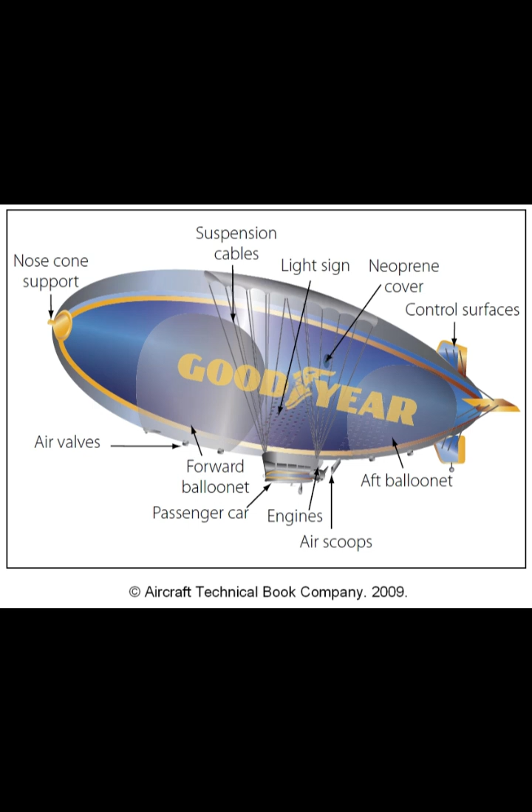And powered parachutes? They look like a parachute with a fan on the back. Pretty much. It's a flexible fabric wing, like a paraglider wing, attached to a carriage. The wing isn't rigid, it's inflated into shape by the airflow from the propeller and the forward motion, ram air inflation. Inflated by air. How do they fly?

Once the wing inflates and generates lift, usually around 28-30 mile per hour airspeed, the aircraft takes off. Climb and descent are controlled purely by engine throttle. Throttle for up-down. How do they turn? Turning is usually done with foot pedals or steering bars that pull down on the trailing edge of one side of the wing. This increases drag on that side and changes the lift slightly, causing the aircraft to yaw and bank into a turn. Very simple controls.

Simpler machines, different aerodynamics. Well, that covers an amazing range of physics principles that all come together in aviation. It really does, from the very basics of matter and energy, force and motion, all the way through fluid dynamics, thermodynamics, sound, and the specific aerodynamics of different types of aircraft. It's all interconnected. And having a grasp of these fundamentals is just crucial for anyone working with aircraft, whether maintaining them or flying them. Absolutely essential.

Understanding why things work the way they do makes you safer and more effective. It really makes you appreciate the ingenuity behind flight, seeing how these physical laws are harnessed, it's quite something. This has been a really thorough grounding in the physics underpinning aviation. We've covered a lot of ground, definitely. And really, each of these topics could be a whole discussion in itself. There's always more depth to explore.

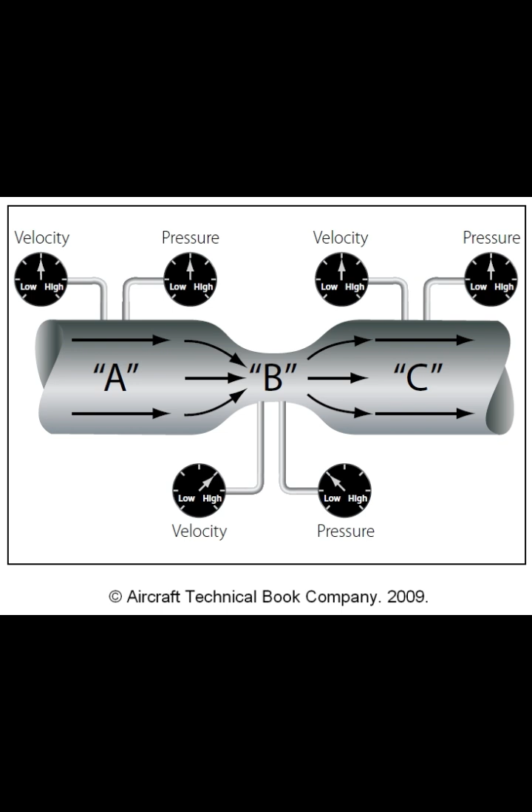Something for our listeners to perhaps ponder is which of these principles seems the most counterintuitive or surprising when applied to making something so heavy fly. Definitely food for thought. Thanks for walking us through all that. My pleasure, it's fascinating stuff.